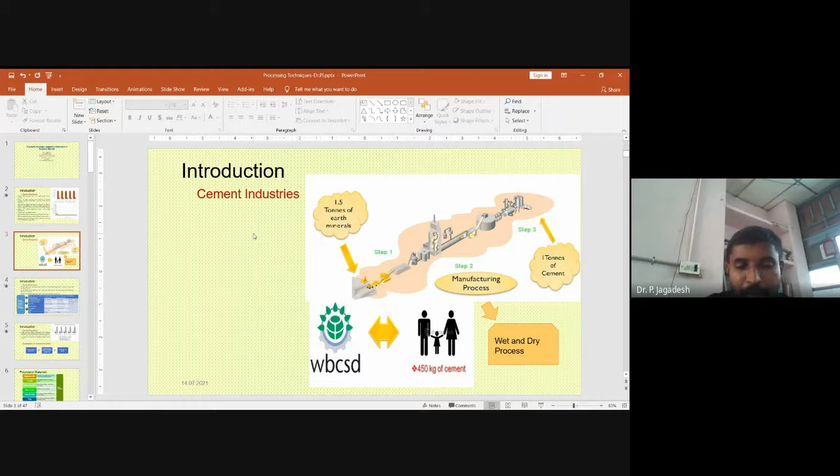If you see this slide, it shows there are three processes involved in the production of cement. For production of 1 ton of cement, you consume almost 1.5 tons of earth, natural minerals. According to the World Business Council for Sustainable Development, as I indicated earlier, the average per person consumption rate of cement across the globe per annum is almost 450 kg.

Cement plants are spending almost 35 to 50% of the total manufacturing cost of cement to meet their energy demands. For production of every ton of cement, almost 1.65 tons of limestone, which is pure calcareous in nature, 0.4 ton of clay, and 0.05 ton of gypsum are required. Approximately, it requires 2.1 tons of natural resources to produce 1 ton of cement.

Remember that we are destroying the earth in such a way that to produce every kg of cement, we consume 2 kg of natural materials. We are making such an impact on the world environment. Worldwide total OPC production leads to almost 7 to 8% of total carbon dioxide production. This 8% of CO2 is split several ways that I am going to discuss.

Here I am mentioning the energy consumption and CO2 emission from cement production from several references, as quoted by Choate and Shen, the IEA, and the Bureau of Energy Efficiency report; I have tabulated this. Raw material quarrying consumes only 2% of energy utilized, whereas raw material grinding consumes 26% of energy.

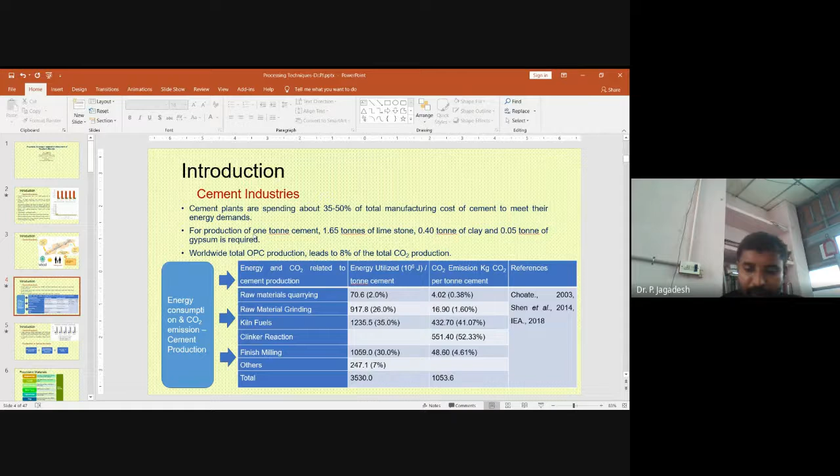If you take the cement industry, it consumes a large amount of supplementary cementitious material. I already discussed the meaning of supplementary cementitious material and how it differs from admixtures. The cement industry consumes 27% of fly ash generated and 100% of slag generated.

And still researchers like us are looking for more new materials that are pozzolanic in nature, so that we can reduce not only CO2 emission but also energy consumption. If you take the Indian market, you can see almost 17 varieties of cements are available. These 17 varieties include PPC, OPC, everything.

Okay. If you see this picture on the right side, it indicates the CO2 and energy consumption at the global level and in the Indian scenario, where CO2 emission is rapidly increasing from 4.27 to 4.39 at the global level, whereas in the Indian scenario it increased from 0.3 to 0.31 into 10 power 9 tons of CO2 produced.

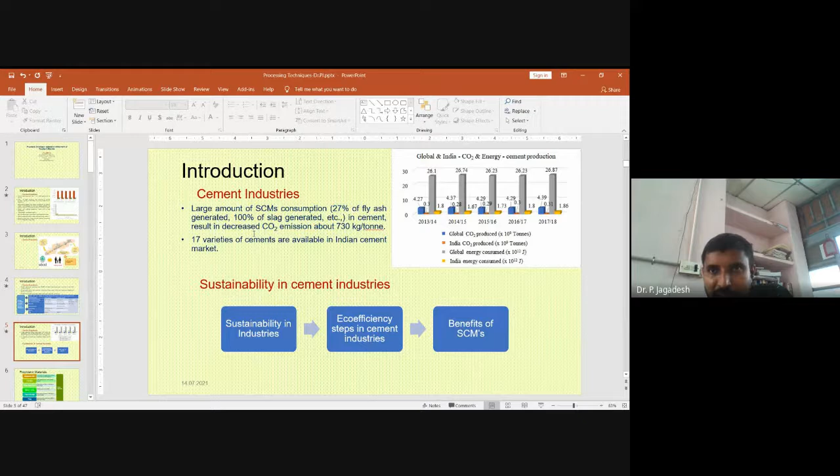And then, as per the Kyoto Protocol and several earlier protocols, sustainability was introduced in industries, especially in the cement sector. Hence, one of the steps is the eco-efficiency steps in the cement industry, which lead to the introduction of supplementary cementitious material and admixtures, with several benefits around economy, environment, and society, which we consider the three pillars of sustainability.

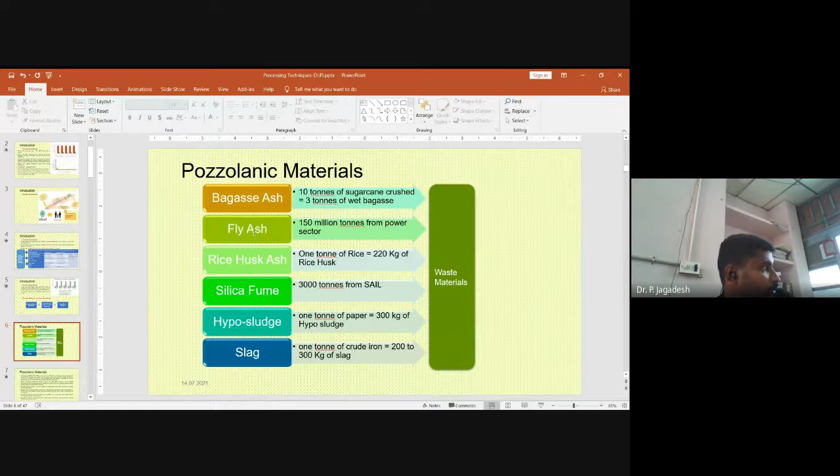If you take pozzolanic materials, I will show several which are widely available not only in the global scenario but also in the Indian scenario. If you take bagasse ash, 10 tons of sugarcane crushed will approximately yield 3 tons of wet bagasse. If you dry this wet bagasse in open atmospheric conditions and burn it, you get dry bagasse ash, and the amount of sugarcane bagasse ash obtained from every ton of sugarcane is almost 65 kg.

Okay. Then if you take fly ash from the power sector, almost 150 million tons are available. Rice husk ash is the material obtained by burning rice husk. Every ton of rice will approximately produce 220 kg of rice husk. Then from the SAIL industry, 3,000 tons of silica fume are produced every year. This silica fume is widely accepted in various sectors, not only in the cement sector.

It will go for several other industries also. Hypo sludge, waste sludge which we obtain from paper industry. Every ton of paper approximately produces 300 kg of hypo sludge. Several studies are also going on in this area to introduce this sludge into cement.

And a well-known thing, a slag. 1 ton of crude iron will approximately produce 200 to 300 kg of slag. Sometimes, depending upon the process, we obtain a ground granulated blast furnace slag, what we call GGBFS. It is obtained from the blast furnace. We include the term blast furnace slag also.

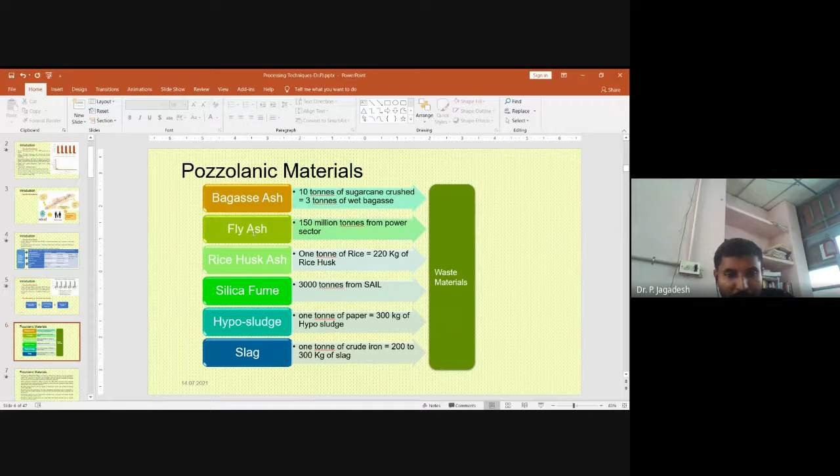These kinds of materials are available in large amounts in the Indian scenario. Hence, most of our researchers who are working in the cement sector are interested to work on replacement with these materials. Okay.

I want to define what is meant by a pozzolanic material. According to ASTM C618, a pozzolana is defined as a siliceous and aluminous material which in itself possesses little or no cementitious value, but which in finely divided form and in the presence of moisture will chemically react with calcium hydroxide at ordinary temperature to form compounds possessing cementitious properties. These cementitious products are like CSH, that is calcium silicate hydrate, and calcium aluminate silicate hydrate, CASH, which provide the binding of aggregates.

When pozzolanic materials are added to cement, the silica present in this material reacts with the free lime released during the hydration of cement and forms additional calcium silicate hydrate as a new hydration product. This additional calcium silicate hydrate gel is more dense in nature. If you look at the proportion of calcium to silica in this cementitious material, it is approximately around 1:2 ratio.

I think two days before, a speaker already spoke about characterization techniques of cementitious material, which can enlighten you on those techniques, from which you can understand the ratio between calcium and silica, and also the ratio between calcium and aluminum. Those things play a vital role in the formation of these additional hydration products or new products.

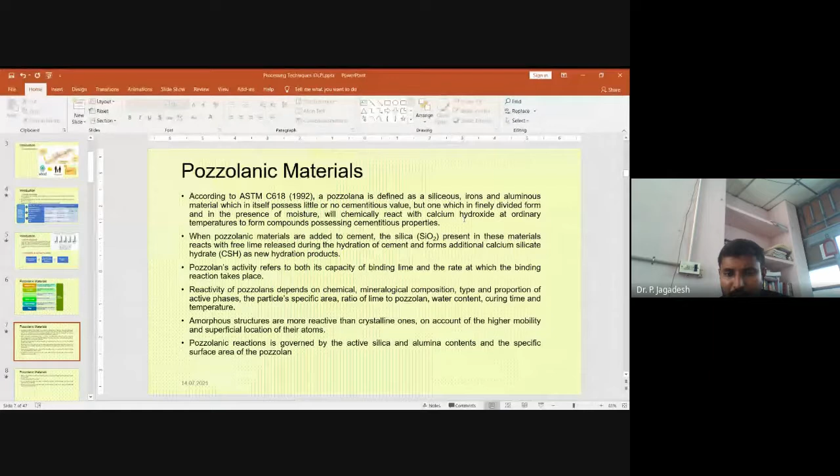Apart from external factors, internal factors like physical, chemical, and mineralogical composition and morphology play a vital role. Amorphous structures are more reactive than crystalline ones on account of the higher mobility and superficial location of their atoms on the surface, which you can identify with the help of SEM, and it is confirmed with the help of XRD. Pozzolanic reaction is governed by the active silica and alumina content and the specific surface area of these pozzolans.

Silica is responsible for earlier pozzolanic reactions, whereas for longer periods, alumina content is responsible. Sometimes the particle packing effect of pozzolan comes into the picture. Cement particles larger than 45 micrometers are difficult to hydrate, and those larger than 75 micrometers could never hydrate completely. They will hydrate partially and contribute to strength only for a certain period.

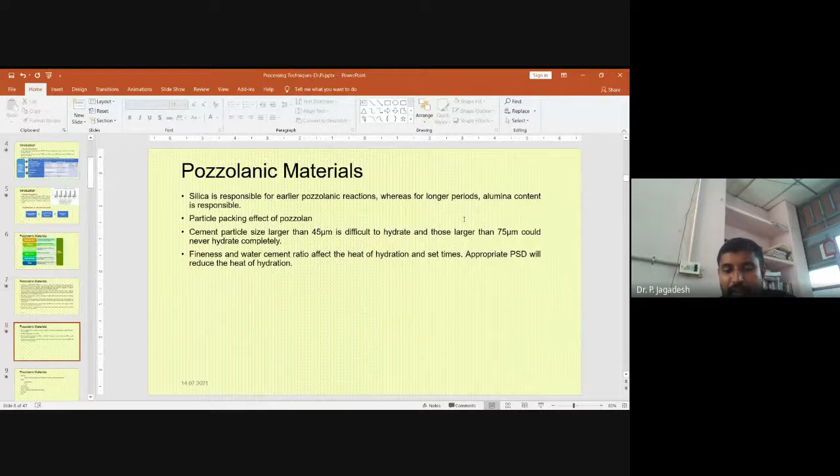Fineness and water cement ratio affect the heat of hydration and setting times. If you provide an appropriate particle size distribution, it will reduce the heat of hydration of your pozzolanic material wherever it is present. Hence, from these two slides, you can say that the definition of pozzolanic material will be based on physical properties.

Physical means the size of particle, the nature of particle, whether it is amorphous or crystalline in nature, and chemical composition. Chemical composition is how much calcium to silica ratio or calcium to alumina content is there. That is the mineralogical composition of those pozzolanic materials, and microscopic structure. The microscopic structure includes the surface nature, the topography of that particular particle, whether it is porous in nature, or how it improves its reactivity; those things will define your pozzolanic material.

Hence, what I'm trying to say is the definition of pozzolanic material slightly varies from what is mentioned in the code. The reason is nowadays people are working on all these backgrounds to confirm whether it is pozzolanic in nature or not. Okay.

The need for this pozzolanic material is that it will introduce sustainability to the field of construction or cement industry, and also it reduces the cost of cement materials, and it has several advantages. Those advantages we will discuss in our next topic.

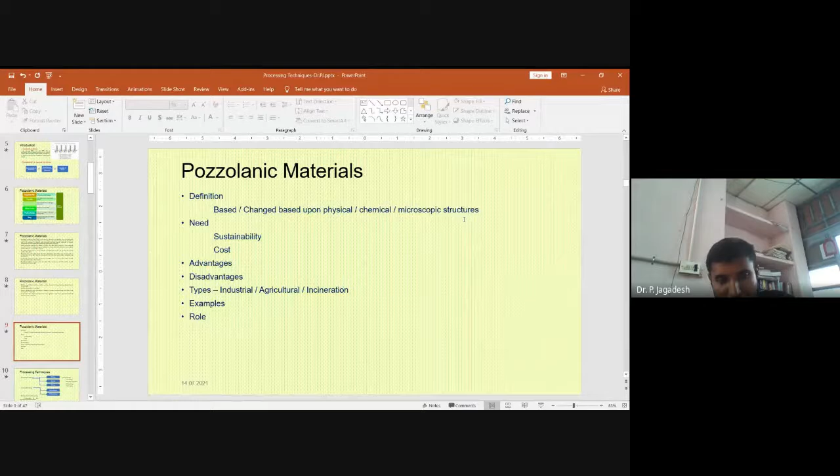In order to enhance the property of pozzolanic material, there are several processing techniques available in the literature. If you look into the literature, it is broadly classified into three types: mechanical processing, chemical processing, and mechanochemical processing. Apart from this, you can enhance or improve the property of pozzolanic material by curing method also.

The mechanical processing is probably divided into three types: sieving, burning, and grinding. For the first, sieving, what we do is take fly ash or whatever material in our laboratory, and ask your student or scholar to first sieve and remove all particles which are having a higher size, that is greater than 90 micron or 75 micron.

If particle size is greater than 75 micron, the hydration of that particular particle is not fully hydrated, it is only partially hydrated. Hence you want to remove the particles which are larger size. Then if the particle is in between above 50 to 75 micron, you want to reduce that particle size.

This particle size can be reduced either by grinding or by burning. Grinding is nothing but introducing your supplementary cementitious material or mineral admixture, your pozzolanic material, into a grinding thing, that is a ball mill. I will show a case study where I had done my research with respect to these techniques, how I reduce this grinding and burning thing.

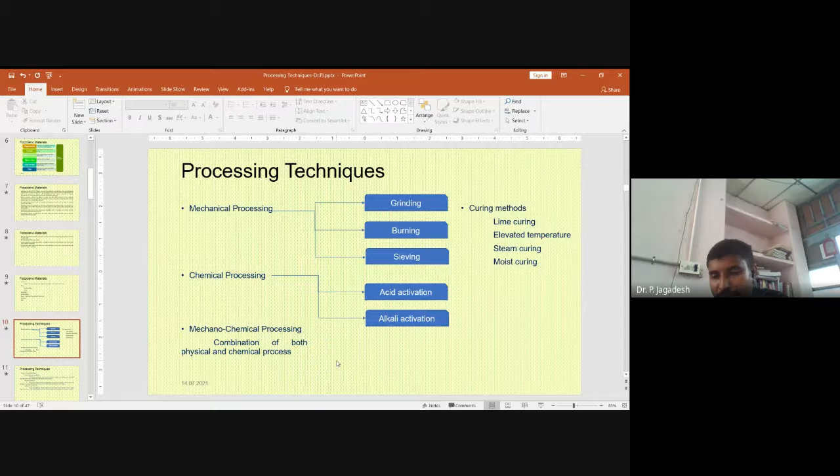Whereas in steam curing, you are supplying hydroxyl ion throughout the system equally, so you get it uniformly throughout the concrete system. Whereas in moist curing, you get somewhat lesser enhancement, just the normal thing we call moist curing.

Then there's the processing technique of physiochemical activation combination, where low temperature calcination happens. Chemical components and mineral structure change by adding some limestone and agents like surfactants, followed by calcination and quenching. Quenching is the sudden cooling of the pozzolanic material.

This term, quenching, is probably mostly used in steel, but it's introduced here because they want to reduce energy consumption. Hence they introduced this low temperature calcination technique.

Thermal activation involves blending lime and ash in a certain proportion in an autoclave, with temperature followed by dehydration and cooling. If you have a new kind of material like fuel ash, you can supply that ash there to thermally activate your material.

Hydrothermal activation involves internal diffusion at the initial stage and chemical reaction at a later stage. Pozzolana is initially mixed with sodium hydroxide solution and heated. Then we separate the alkali and activated sample, which increases the property of concrete.

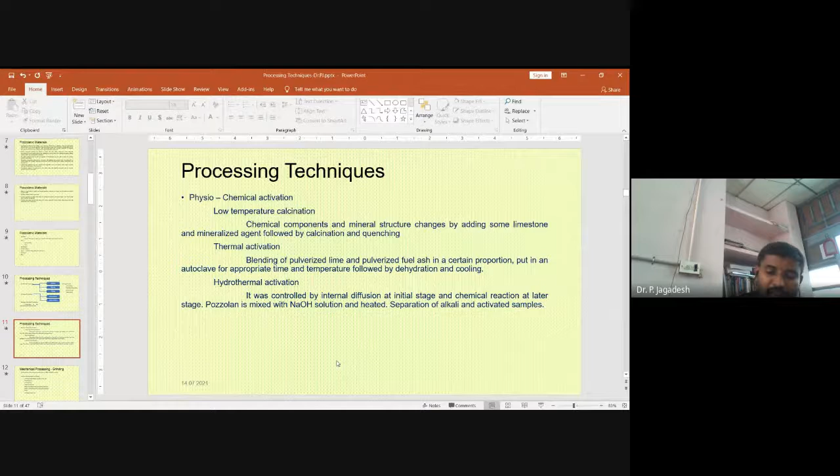First we'll discuss mechanical processing, that is grinding. I'll concentrate more on this mechanical processing. Grinding the material uses various types of mills available in the market - for example, a centrifugal ball mill, a rotary ball mill, or an impact ball mill.

You can recommend any type of material. Take the Los Angeles test as an example of a rotary type ball mill. We introduce the pozzolanic material where steel balls are already present. When introduced, these balls come into contact with the pozzolanic material and break it into smaller sizes.

The factors affecting the output of grinding include grinding media - what type of ball you're using, what material it's made of, and the size and shape of your material. It goes on like that.

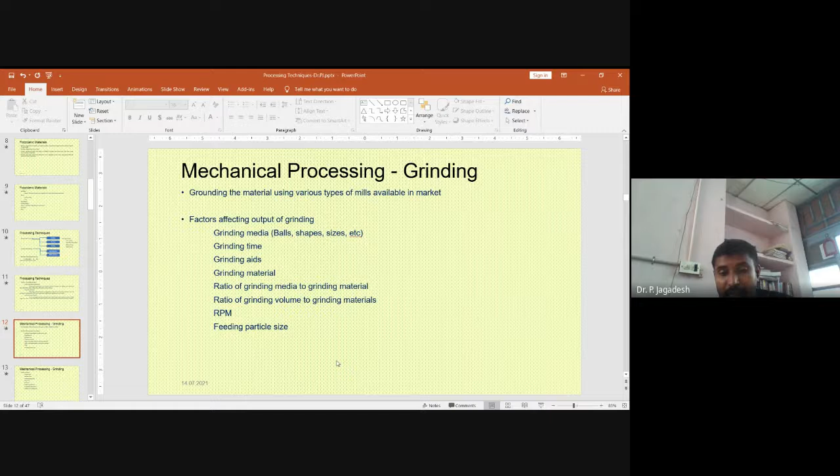Then RPM, rotations per minute of your ball mill, how it is rotating. Then feeding particle sizes. As I said earlier, grinding efficiency depends upon the specific gravity of your material, size of material, and shape of material; it will affect your output of grinding. Hence, if you concentrate more on all these factors, you will make the size, shape, and surface morphology of your particles more efficient. Okay.

What are the outputs checked during this grinding process? First, particle size. Smaller the particle size, as I said, the more surfaces are available to react with the outer environment. Hence, what we call the surface area. Particle size is associated with surface area: if particle size is smaller, surface area is more. Then morphological area and surface texture. For morphological area, I will show an example later; as I said, I will show some case studies with respect to these things.

How the pores are distributed, what the size of pore is, how it is reduced, whether there is any failure surface in the morphology of the particle, those things can be understood. Then fineness, how much it is reduced. Then broken particle size, how it is broken. Then chemical composition: areas are exposed during this grinding process, which exposes several chemical and mineralogical compositions to react.

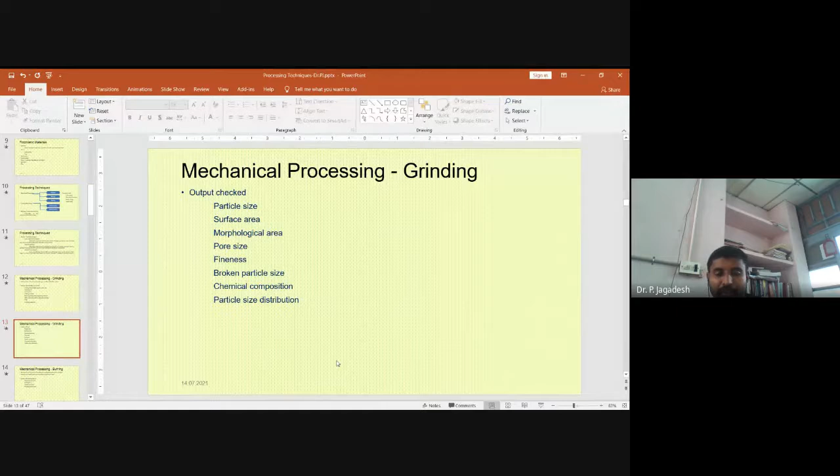Then how the different particle sizes are distributed. As I already mentioned, the size of particle plays a vital role with respect to increasing the density of your system. Then the burning process: burning the material in either controlled or uncontrolled atmospheric conditions, which will increase the efficiency of your material. If you burn in a controlled atmospheric condition, it will yield better results.

The factors governing this burning process are burning temperature, burning time, burning condition, and even feeding particles. What size of particle you are feeding inside the burning chamber plays a vital role in controlling the size of your particles. The outputs checked during this burning process are again particle size, surface area, morphological area, pore size, fineness, and one important thing comes into the picture, that is removal of unwanted materials: how much carbon content is removed. That can be identified with the help of this burning. Then chemical composition and particle size distribution of your pozzolanic material.

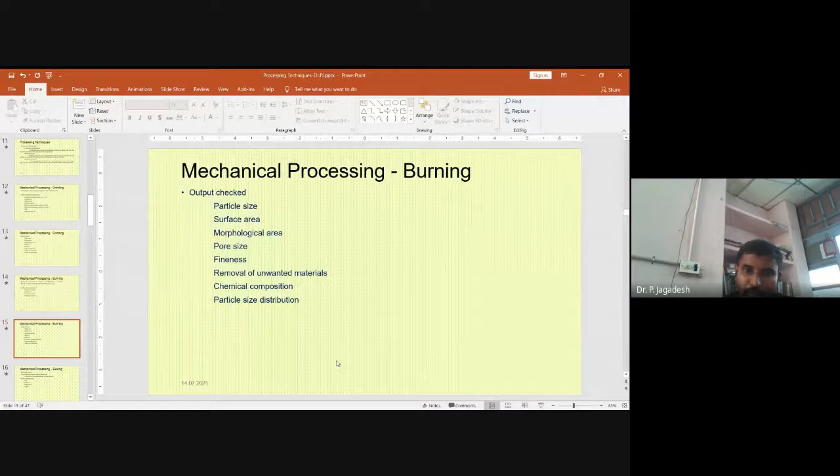Then sieving. There are two types of sieving available, as you know: wet and dry. We will always go for a dry process. Use a pre-treatment process for larger particle sizes. As I already said, whenever you are doing your research, kindly sieve the pozzolanic material you purchase from the market and identify the different sizes of particle available. By pre-sieving, you can identify the larger particle size and whether any processing technique is required or not.

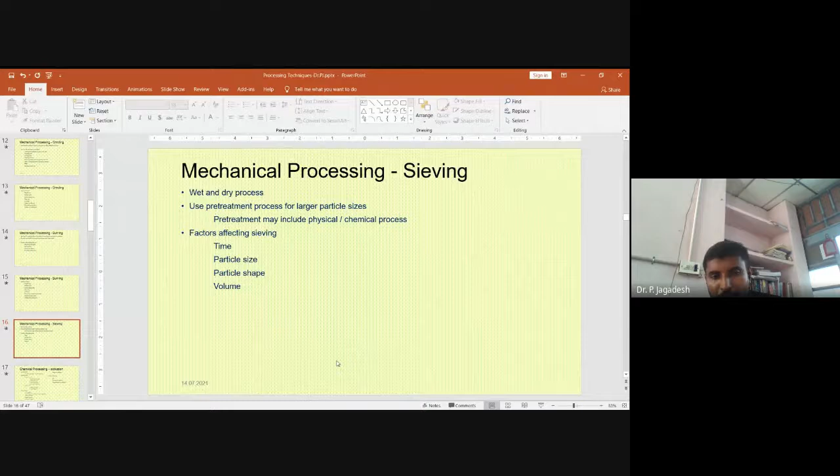Here, what I try to mention is that pre-treatment is required for larger particles alone. How to reduce those larger particles depends upon your physical and chemical processing. The factors affecting sieving are time, particle size, particle shape, and volume. Then chemical processing: activation, acid activation.

In the case of using recycled aggregate, that is surface treatment. If you introduce an acid environment, the cement paste already present around your recycled aggregates can be removed. It will expose the area where the old mortar is not present. Hence, acid activation is highly recommended in the case of recycled aggregates. In alkaline activation, alkaline reagents like sodium silicate solution, sodium hydroxide, calcium hydroxide, and potassium hydroxide are recommended by several researchers.

And alkaline salts are available in market. If you combine this one day before, you can have this alkaline solution where you can make a cement with your pozzolanic material having a similar kind of binding nature.

The other solutions which are used for activation are lime solution and cement silica fume slurry, which is again used in recycled aggregate alone. This silica fume slurry is used to coat your recycled aggregate. Then calcium sulfate, sodium sulfate, potassium sulfate are used to activate your pozzolanic material. And polymer activators are also available in literature.

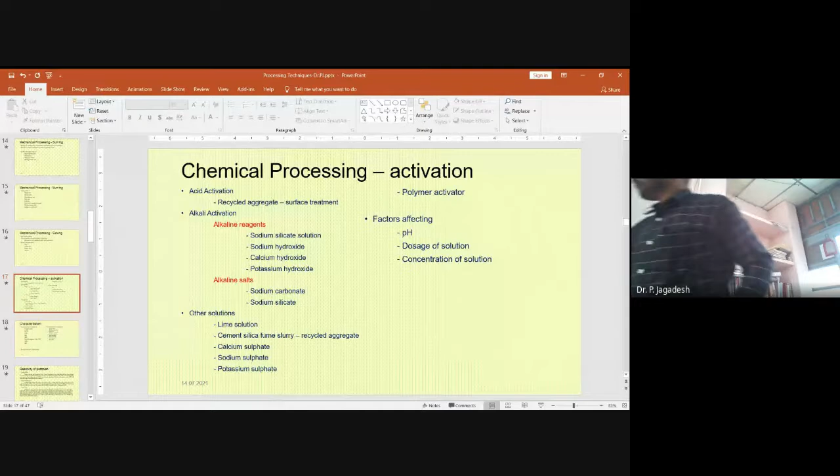Just give me 2 minutes. If you have any doubt, you are welcome. Hope I'm not boring this session. If you have any question, let me know, sir. I have covered almost what processing techniques are required. I can wait for 2 minutes. If you need any clarification regarding this processing technique, I can clarify. Okay, shall I continue, sir, if you have no doubt? Okay. So my screen is visible? You can continue. We can get clarified, sir. Okay, sir. Thank you.

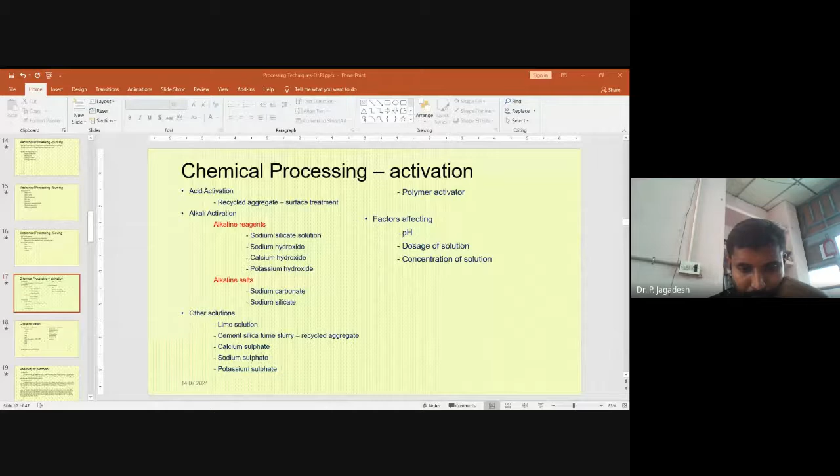Characterization techniques: the characterization of ingredients can be done. I think the speakers before me discussed these techniques like field emission scanning electron microscope, EDAX, that is energy dispersive X-ray analysis, Fourier transform infrared spectroscopy (FTIR), XRF, X-ray fluorescence spectroscopy, XRD, X-ray diffraction, and thermal analysis using TG and DTG curves, that is thermogravimetric analysis and derivative thermogravimetric analysis, TEM, transmission electron microscope, and BSE, backscattered electron imaging from SEM.

A lot of techniques are available nowadays. Some microscopes are available, and mercury intrusion porosimetry is available in several laboratories to identify the size of pores in your concrete, but we are not going for such a long thing. You want to characterize your material depending upon the type of processing you used.

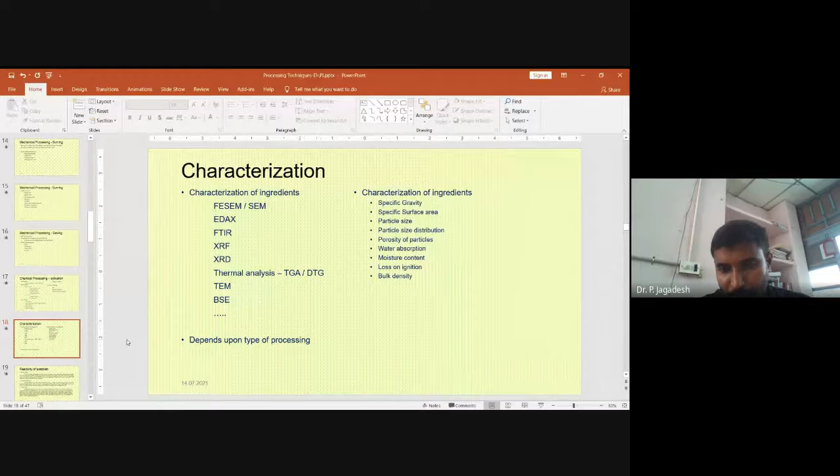The characterization required: you want to identify the specific gravity of the material obtained from your processing technique, then the specific surface area of the output product, then the particle size distribution. If possible, go and read about porosity of the particle. What is the porosity nature? What is the volume of pores present in your pozzolanic material?

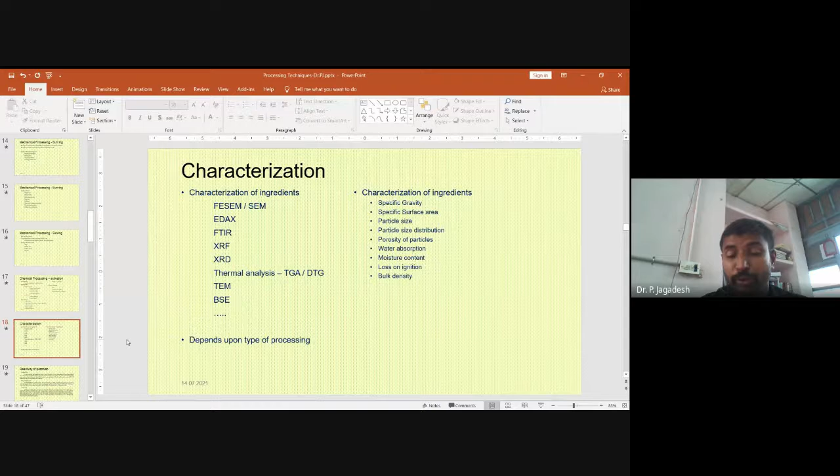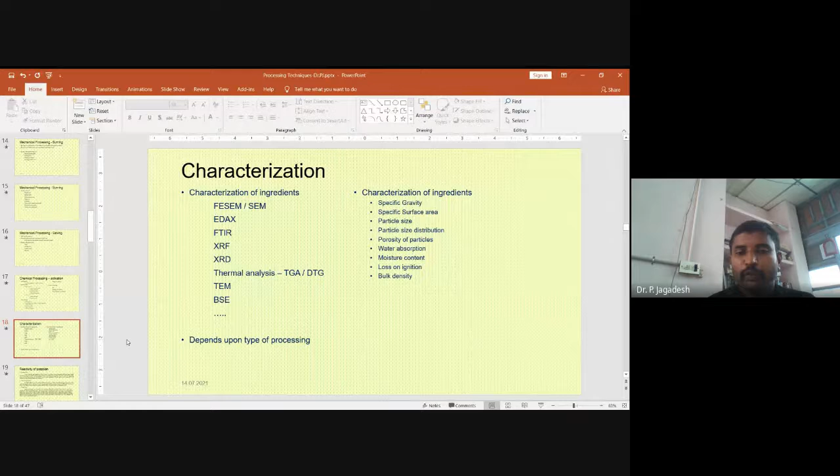The water absorption capacity of your material can be identified, whether moisture content is present, and loss on ignition, which clearly indicates how much carbon is present in that material, and finally density. You want to do all those things in order to identify how it is improved from its original version. Then for reactivity of pozzolana, these are the well-known tests.

You can do Chapelle, lime reactivity, Frattini, lime saturation, and strength activity index. We will mostly do the strength activity test, that is 28 days compressive strength of control concrete and that of your pozzolanic material concrete. To be identified as a pozzolanic material, it requires a minimum of 75% of the strength at 28 days. If it is achieved, we call it a pozzolanic material.

This is the maximum you see in all those papers, but if you want to publish in very good journals, can you do lime saturation, Frattini, lime reactivity, Chapelle test? These are simple tests. You can do all those things.

If you take the Chapelle test, you take 1 gram of calcium hydroxide with 1 gram of pozzolana and 250 grams of water, boiled at 90 degrees Celsius for 16 hours. Then free lime content is measured by titration, and fixed calcium oxide content is calculated by titrating with 0.1 N HCl from the burette using phenolphthalein as an indicator. You know this titration, which you have done in your graduation period.

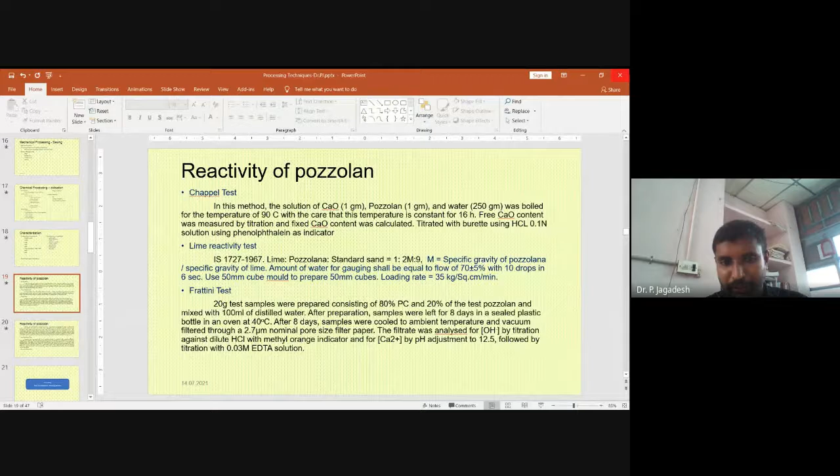And also go for lime reactivity. These tests are simple tests. You can do them in your own laboratory itself, but some few tests indicate only titration.

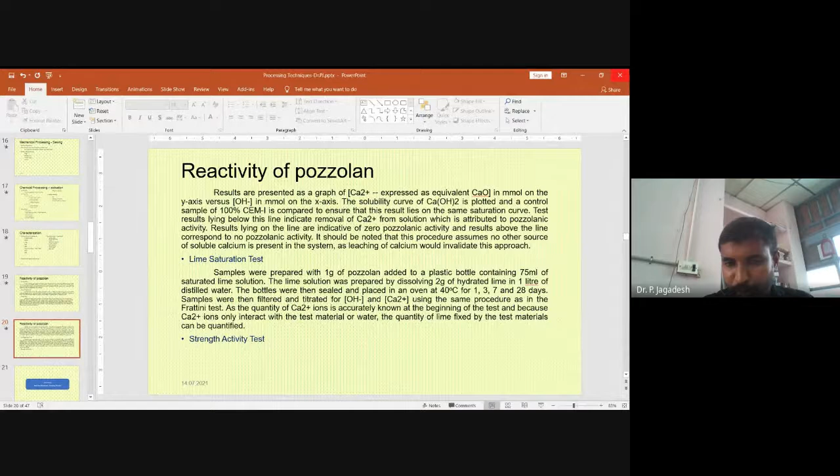Okay, then, as I said earlier, I will go for a case study, which is my research topic, where I had done a processing technique for sugarcane bagasse ash. Before entering into this topic, I want to explain what sugarcane bagasse ash is. I think everybody is well aware of the meaning of sugarcane: the plant from which we get sugar is what we call sugarcane.

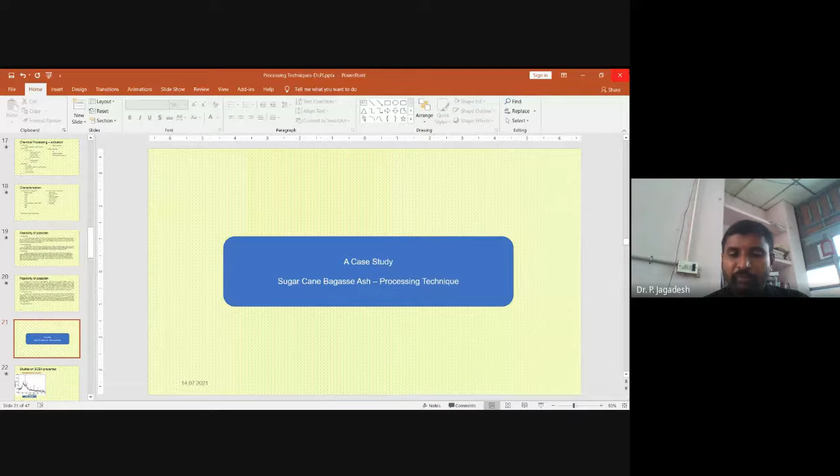The sugar juice is obtained by crushing these canes. The waste material after extraction of juice is what we call wet bagasse. This wet bagasse is dried in open atmospheric conditions to obtain dry bagasse. This dry bagasse is burned as per whatever the requirement is to get sugarcane bagasse ash.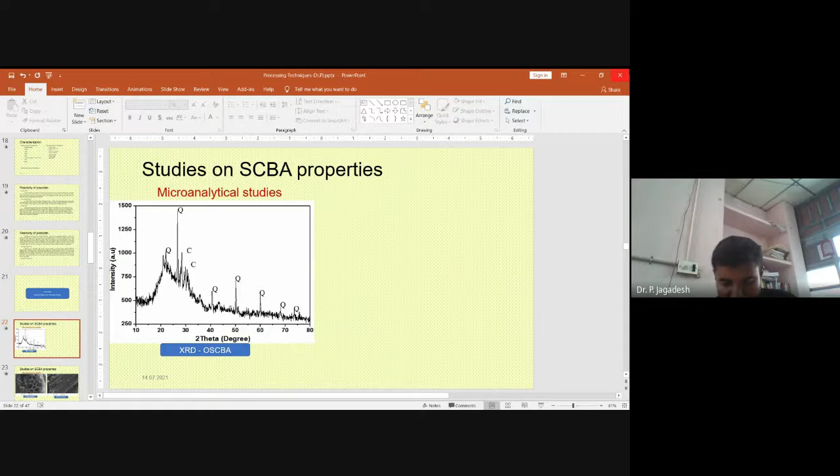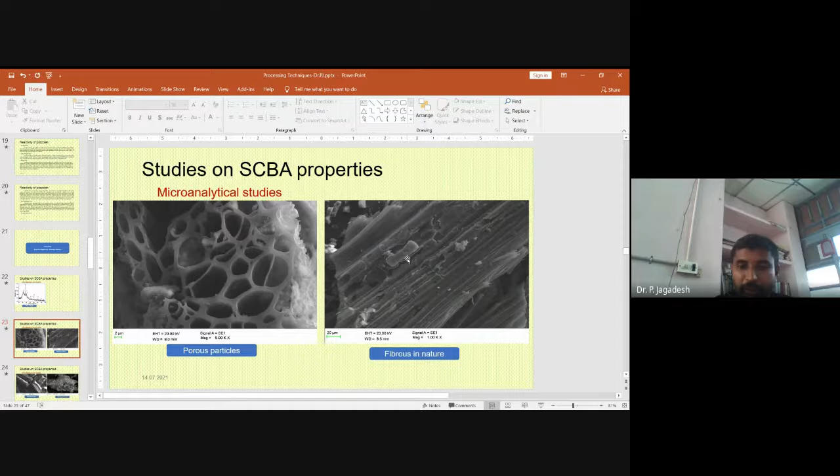Another indication that your material is not reactive in nature is the spongy type. The spongy nature indicates that a large amount of carbon content is there, which is observed with the help of EDX, that is energy dispersive spectroscopy analysis. By using that spectroscopy, you can observe what the surface will be and how it will act.

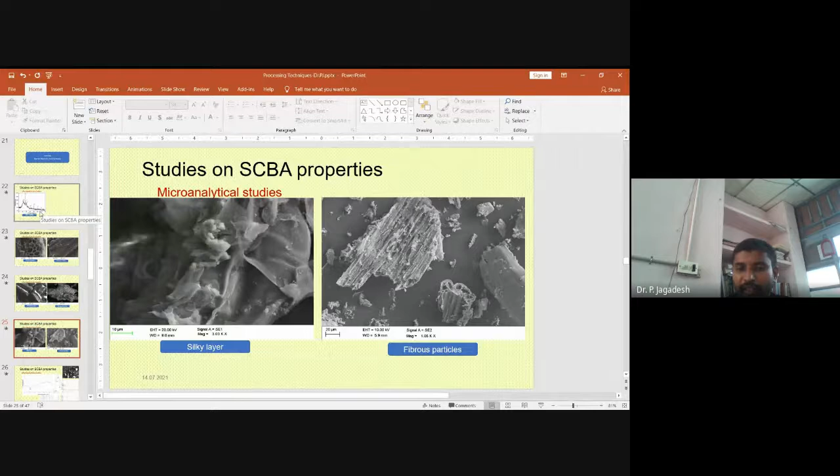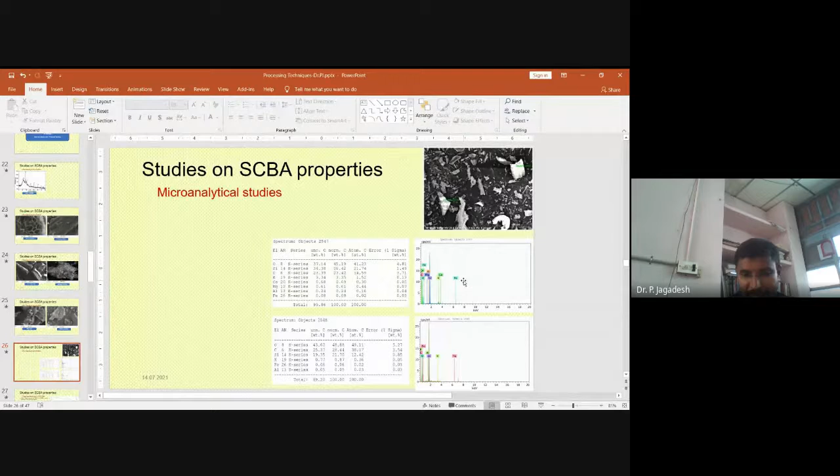In the spectrum you can see the CPS, counts per second. The higher amount is observed for silica alone in both cases. This indicates that the presence of silica is confirmed. It is identified and morphologically verified, the different formation is explained with the help of FTIR, and it is confirmed in EDX. If you still need confirmation, you go for XRF. That is also done, I think.

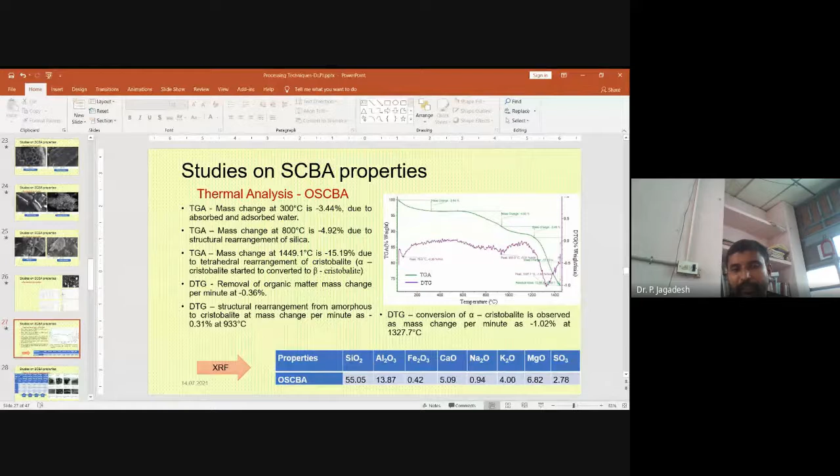If you go for XRF, X-ray fluorescence spectroscopy, different compositions of your minerals are observed here. This indicates that a larger amount of Al2O3 and SiO2 is present. This indicates that this is a pozzolanic material. A large amount of silicon dioxide and aluminum oxide is present, but in an unreactive form. You want to introduce several processes in order to get your material active in nature.

Now, what I had done is, initially I obtained the material from industry. For example, I take that material initially as 5 kg. I will initially sieve it, and how it looks I observed with the help of FESEM. The particles passing through 600 micrometer and retained on 300 micrometer, I call coarse unburned particles.

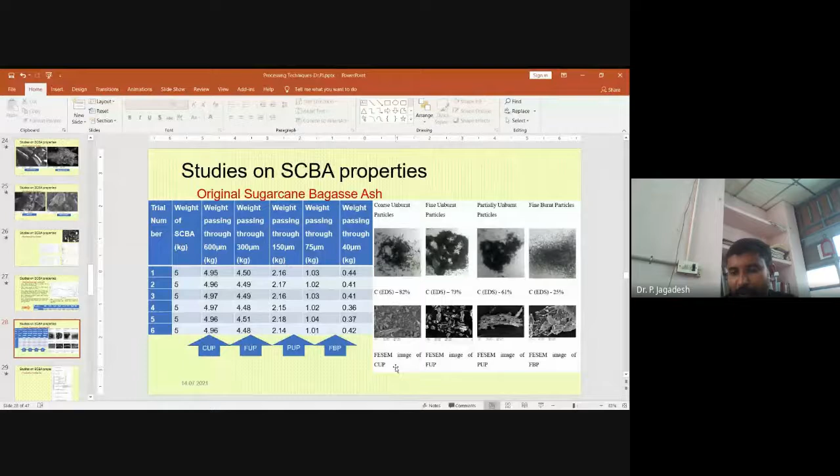The carbon content is drastically reduced. That is, at the initial stage itself, you can remove a large amount of carbon by normal sieving. You can see this using EDX analysis. EDX is sometimes called EDS, energy dispersive spectroscopy. You can see a drastic reduction in carbon content for fine burned particles. Based upon particle size itself, the carbon content is reduced.

The characterization I had done, I had shown earlier. Then what I started doing is I sieved this original sugarcane bagasse. The particles which are less than 600 micron, I take to the classification of SCBA particles. Or else, I pre-burn the particles. Pre-burn is nothing but burning this sugarcane bagasse in an oven at 100 degrees Celsius for 24 hours.

Then I make it pre-ground using the Los Angeles test equipment for 30 minutes, and again I go for sieving. In a similar way, I reduce the size of the particles and classify this material as 4 types: 600, 300, 150, 75, and 40 micron size. Then I go for the processing techniques adopted. The processing technique I initially tried is a combination of grinding and burning.

In the grinding technique, I introduce these particles to a ball mill with variation in the volume of ash to volume of grinding balls, and the diameter of grinding balls is varied. Different sizes of balls are used as grinding media. The feeding material, which I classified as 4 types, is also varied. The ratio of volume of cylinder to grinding material can also be varied; I fixed it as 1:5 and 1:4.

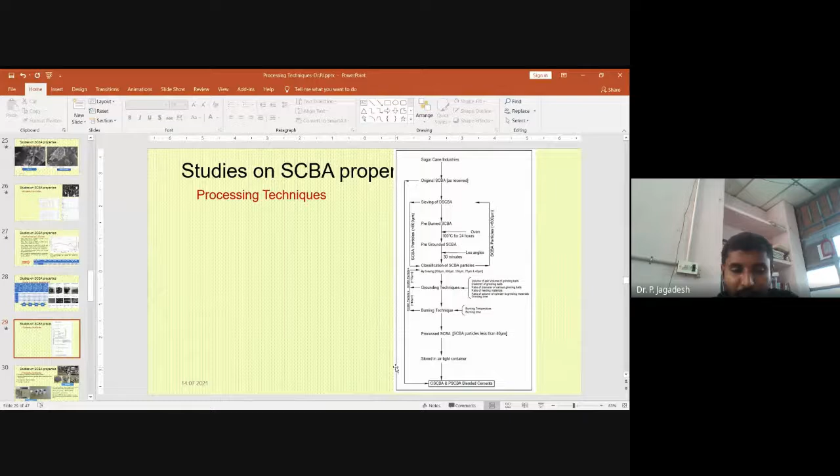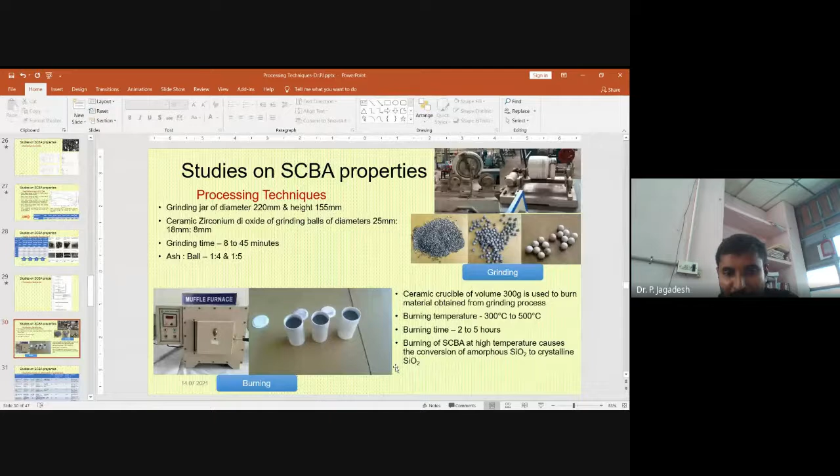The methodology is shown here in a flow chart, initially with the grinding technique. On the right side, grinding balls of different diameters are used: 25 mm, 18 mm, and 8 mm. The type of ball used is ceramic; zirconium dioxide balls are used for grinding. The grinding jar has a diameter of 220 mm and height of 155 mm.

Grinding time is varied between 8 to 45 minutes to get a minimum particle size and appropriate particle size distribution. Ash to ball ratio is kept as 1:4 and 1:5. Then for burning, the muffle furnace on the left, with a maximum temperature of 1100 degrees Celsius, available in our institute is used.

A ceramic crucible which can withstand up to 1000 degrees Celsius, with a capacity of 300 grams, is used to burn the material obtained from the grinding process. The burning temperature is varied between 300 to 500 degrees Celsius, and burning time from 2 to 5 hours. Kindly remember that doing this processing technique and obtaining almost 50 kg of PSCBA took me almost 4 months.

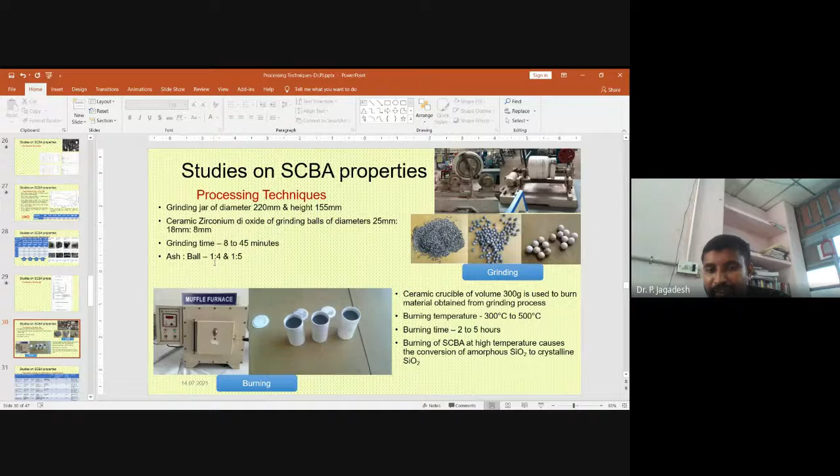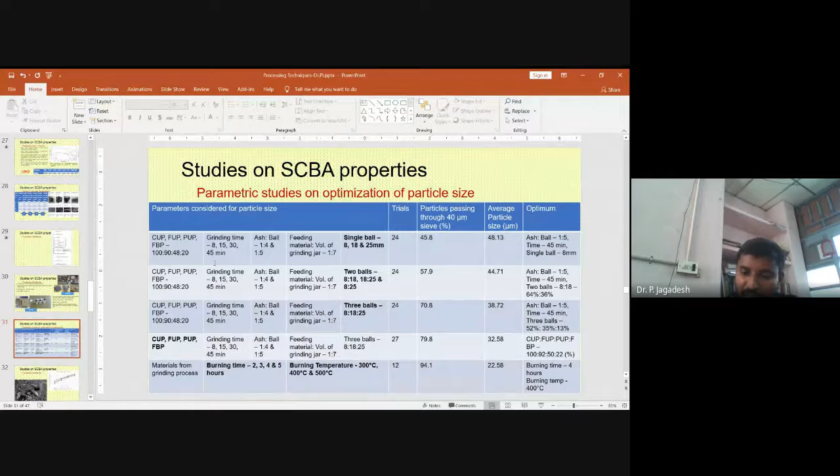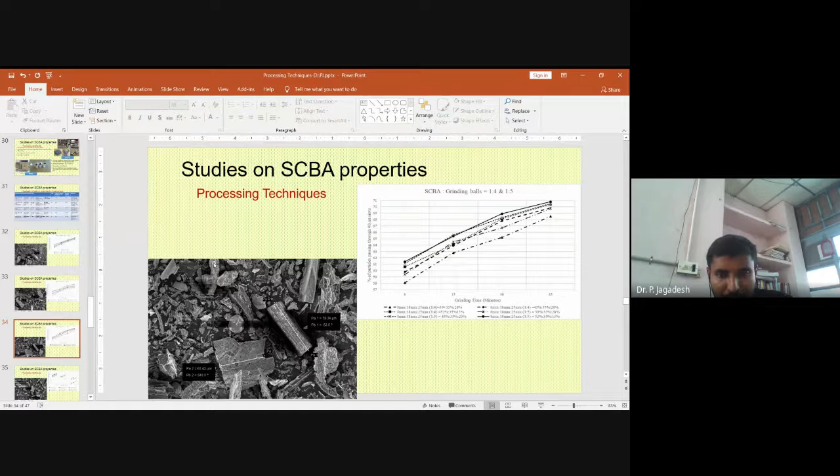Then the third thing, the combination of three different balls, that is 25, 18, and 8mm balls. Still, you can observe there is a prismatic shape of crystals of SCBA observed using FESEM analysis.

Then the feeding material ratio thing. If a ratio of 150 micrometer to 75 micron is maintained as 2:1, what will be the percentage of particle passing through 40 micron sieve? Using different proportions of particles feeding inside also plays a vital role in production of lesser particle size. You can see the particle size is reduced.

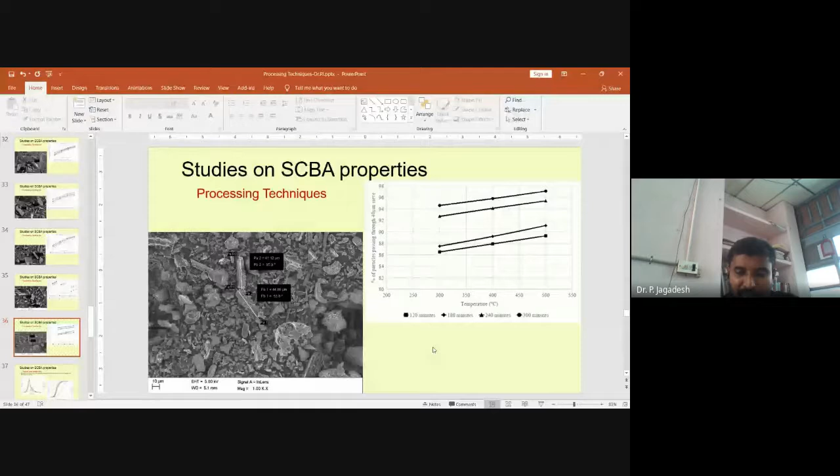Then finally the burning temperature thing. Using burning technique, increasing temperature with increasing time, you can see a lesser amount of particle is obtained. But keeping in mind lesser energy consumption, the processing technique adopted uses lesser temperature, around 400 degrees Celsius, since 96% is obtained as maximum particle size.

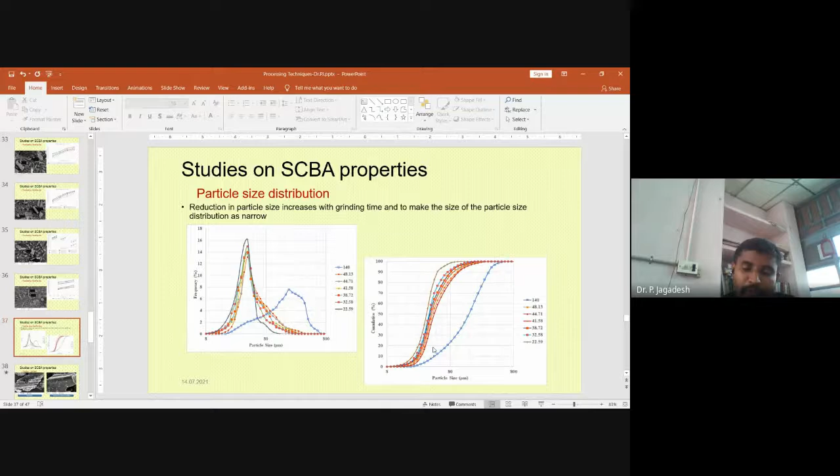Then you can see a modular distribution of particle size distribution shown in the first curve for different sizes of particles obtained from each process - single ball, double ball, combination of three balls, variation in input particles, combination of all those things, and the temperature thing. All this is shown here. Evenly particle size distribution with cumulative percentage is shown here, where you can see particle size is logarithmically distributed, which is helpful for producing highly packed material or increasing the filler effect.

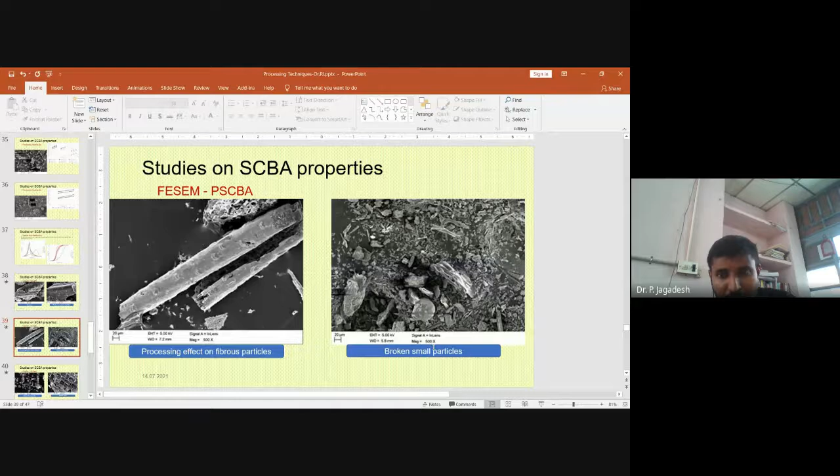You can see the processing effect, that is the impact of smaller particles on your fibrous particle. The broken particle sizes are shown here, and smaller particle sizes are formed, more amount of smaller particle sizes are formed. Even fibrous particles are broken into smaller pieces, which increases the surface area inside your processed sugarcane bagasse material. There is a surface crack in fibrous material with the formation of nanopores observed.

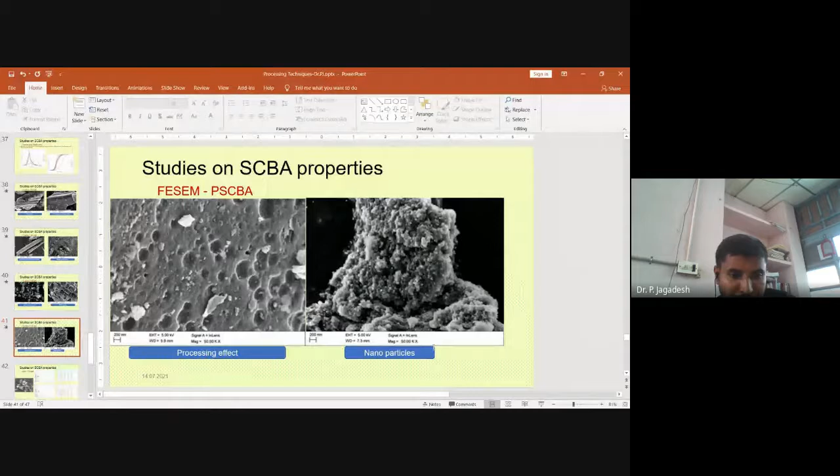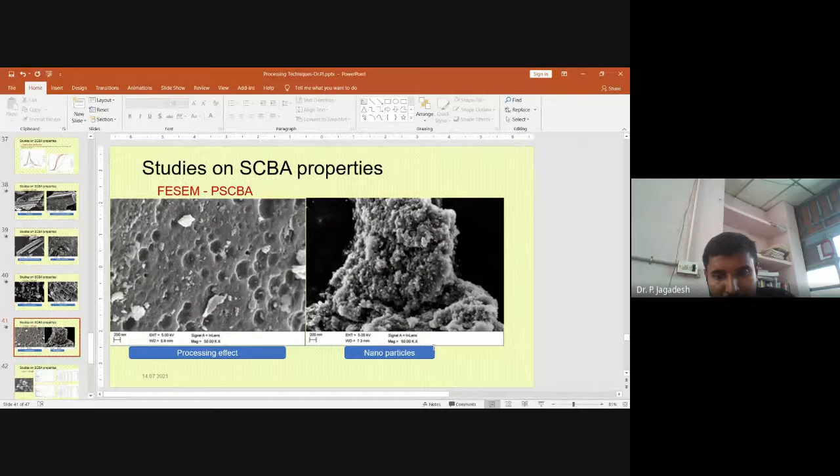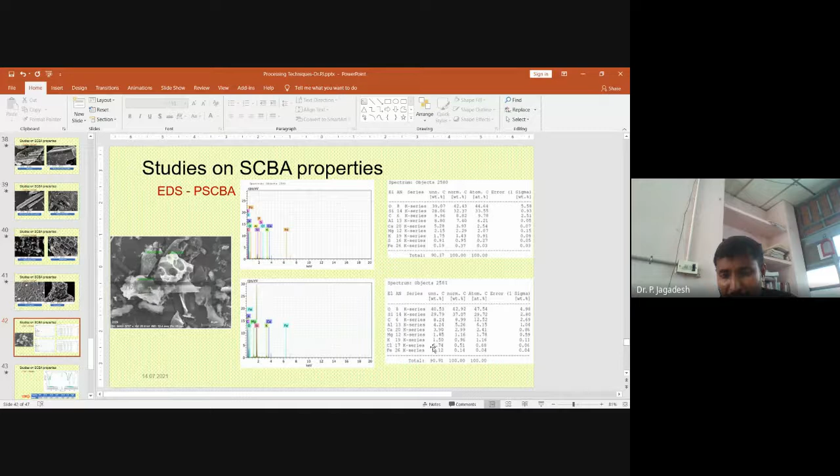Processing effect indicates that the impact of small particle on the surface of your SCBA is observed on the left side figure, whereas on the right side figure the formation of nanoparticles under 200 nanometers is observed with the help of SEM. With the help of EDS, you can see the increasing proportion of calcium to silica ratio at different materials once processed. The proportion of calcium to silica ratio is increased, and even the proportion of calcium to aluminum is also increased.

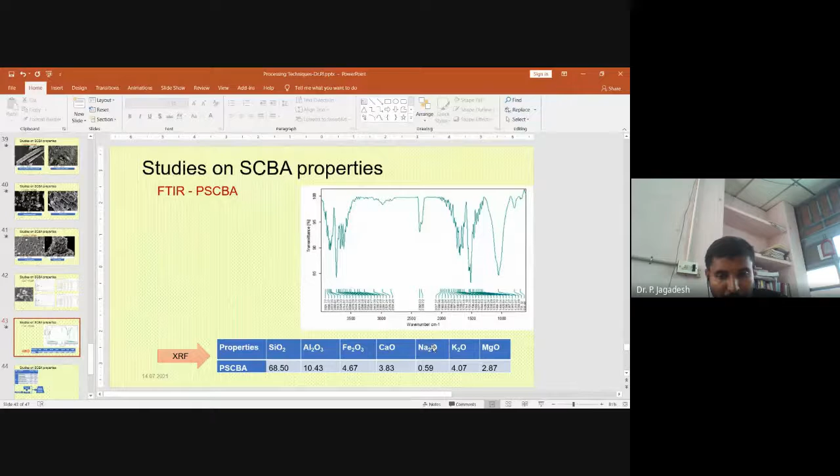X-ray fluorescence spectroscopy is used to determine the different chemical composition of your pozzolanic minerals, that is SiO2, Al2O3 and Fe2O3. You can clearly see how it increased.

Then the specific gravity of original sugarcane bagasse ash - as I said, the factors we want to compare - specific gravity is increased from original sugarcane bagasse to processed material. Water absorption is reduced, moisture content is reduced, bulk density is increased, and mean particle size shows a drastic decrease, from 105 to 40.

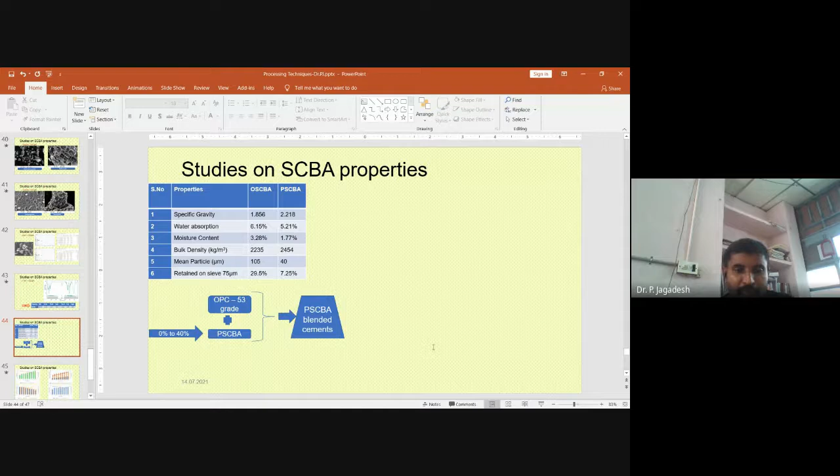Then it is blended with cement. The property of cement is shown in this slide. With increasing PSCBA content, you can see there is an increase in strength. I had gone for 40% replacement of ordinary Portland cement of 53 grade.

I had determined the consistency and specific gravity for PSCBA, shown here. I didn't show the OSCBA values since it improved a lot.

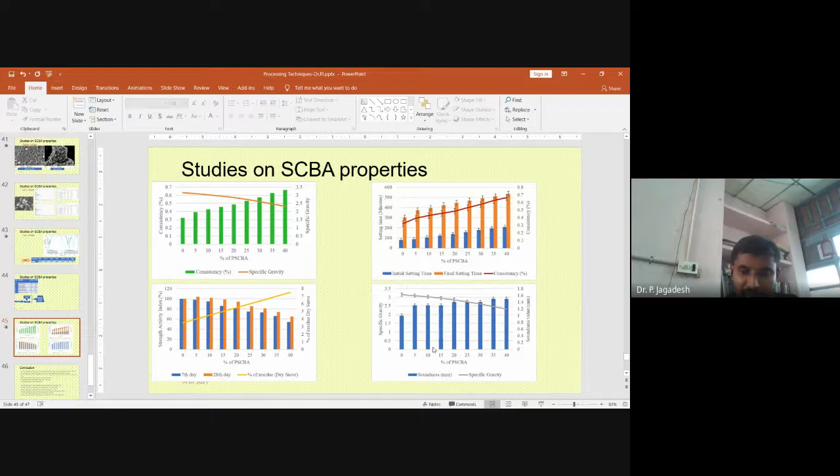Final conclusion: for the past 5 years, almost more than 4,000 million tons of cement is produced globally, and 280 million tons are produced in India. The average contribution to economic development of the country is almost 35% coming directly from the cement industry alone. There are also many other factors contributing to economic development related to this cement industry. Globally and in the Indian scenario, the production of SCBA is almost 100 million tons and 22 million tons respectively.

So such a huge availability of SCBA makes it likely to be introduced as a new kind of supplementary cementitious material in the Indian market, by introducing it as the 18th variety of cement as bagasse cement.

Processing techniques depend upon the type of pozzolanic material being used. The processing technique will enhance the property of pozzolan, as we already discussed. These techniques should be sustainable in nature. We will concentrate more on sustainability, not only in processing of cement but also in processing of pozzolan itself, to make it sustainable in nature.

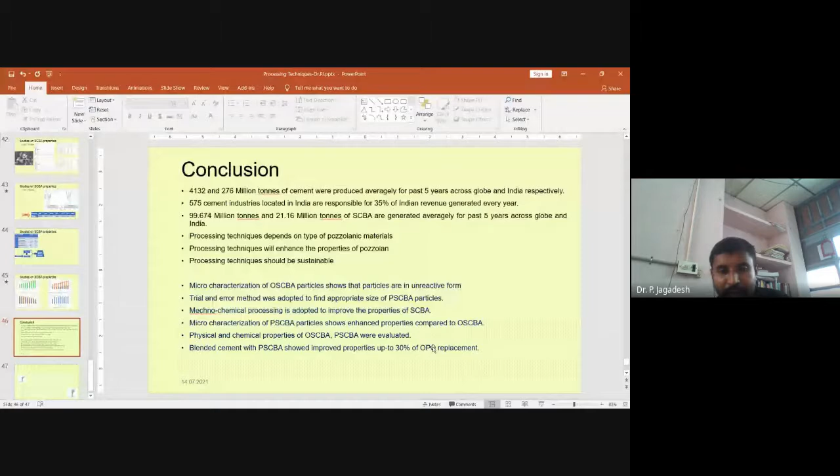Physical and chemical properties of OSCBA and PSCBA were evaluated. Blended cement with PSCBA showed improved properties up to 30% OPC replacement. Hence, it is viable to introduce sugarcane bagasse ash as a replacement for cement.